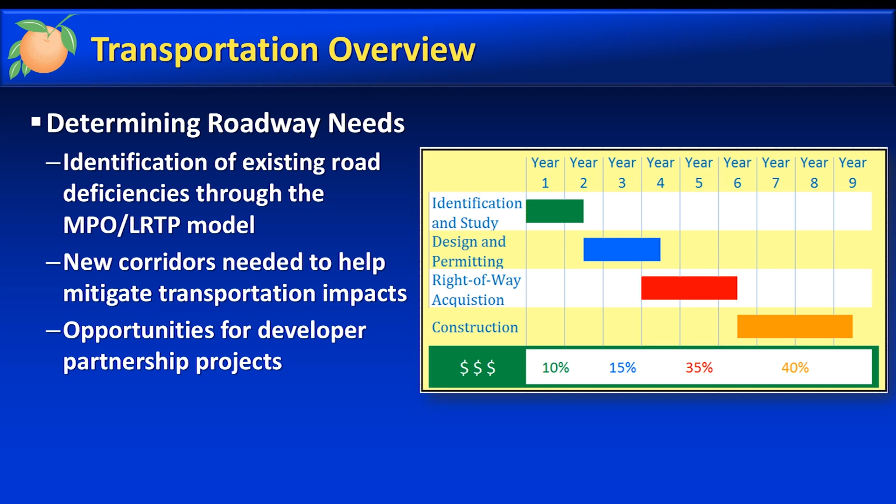Funding allocated to the Public Works Capital Improvement Program is dedicated to a variety of transportation improvements that are tailored to increase traveler safety, the reduction of travel time delays, and increased mode choice. The county's fiscal year runs from October 1st to September 30th each year, and the total funding for the current fiscal year, 2019-2020, is just over $121 million.

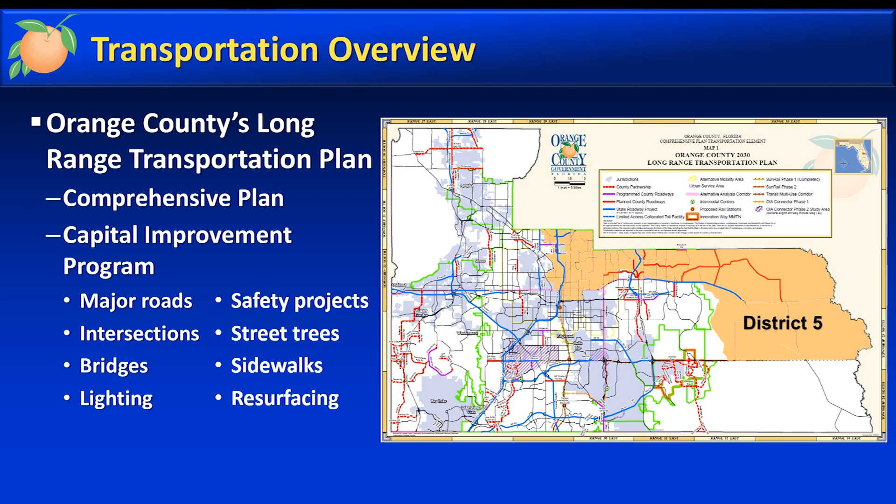Next, we will discuss the list of recently completed projects in Commission District 5.

The first project entails the UCF Area Pedestrian Safety Study. This 4.6-mile safety study was completed in late 2016. The intent of the study was to identify measures and physical improvements to specifically address pedestrian and bicycle safety. The project is currently in the design phase and should start construction next year.

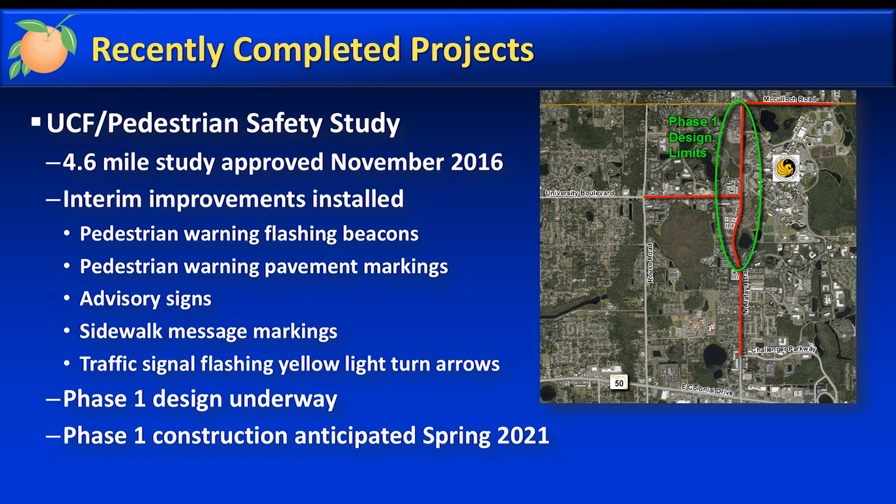Some of the improvements will entail the construction of a 10 to 12 foot wide sidewalk along the UCF campus, allowing for safer travel by both pedestrians and cyclists. The project will also include improvements at major signalized intersections, the addition of pedestrian scale lighting, signalized mid-block crossings on University Boulevard and Alafaya Trail, as well as pedestrian channelization to assist roadway crossings at appropriate locations. In the interim, the county has already installed pedestrian flashing beacons, pavement markings, advisory signage, along with other measures.

The other study recently completed is the UCF Research Parkway Study. This study was conducted at the request of the Central Florida Research Park to analyze and assess cut-through traffic, and the study was completed in May 2019.

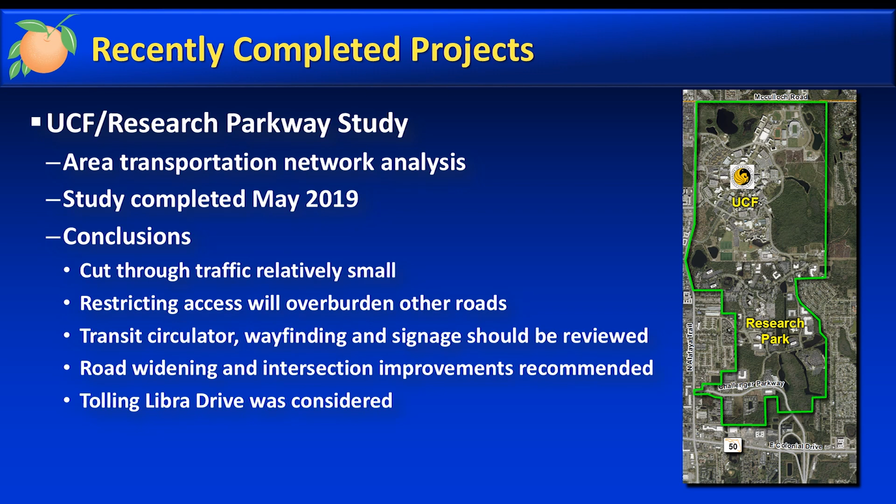The research park was concerned with the perceived number of cars cutting through the park to gain access to UCF and other areas. However, the study results showed that relatively few cars did in fact cut through, but nevertheless, a number of potential intersection improvements were identified that could alleviate some of the congestion in the park.

Next, we'll be moving on to projects underway. The projects currently underway include an area study, a safety project, and several roadway capacity projects.

The Northeast Orange County Area Transportation Study, or NEOCATS for short, is in the process of hiring a consultant team and will soon be fully underway. The NEOCATS project is currently going through our procurement process and should start this fall. The study is intended to assess current and future traffic conditions and needs in an area bounded by the Seminole County line on the north, north of State Road 50, east of Alafaya Trail, and west of Chuluota Road.

Once a contract is awarded by the county, we will seek input from the community to identify a range of appropriate improvements to address existing and long-term needs.

The next project is a roadway safety project on Fort Christmas Road. This safety project is currently in the construction phase and is approximately 20% complete. It is anticipated the project will be finished by October 2020.

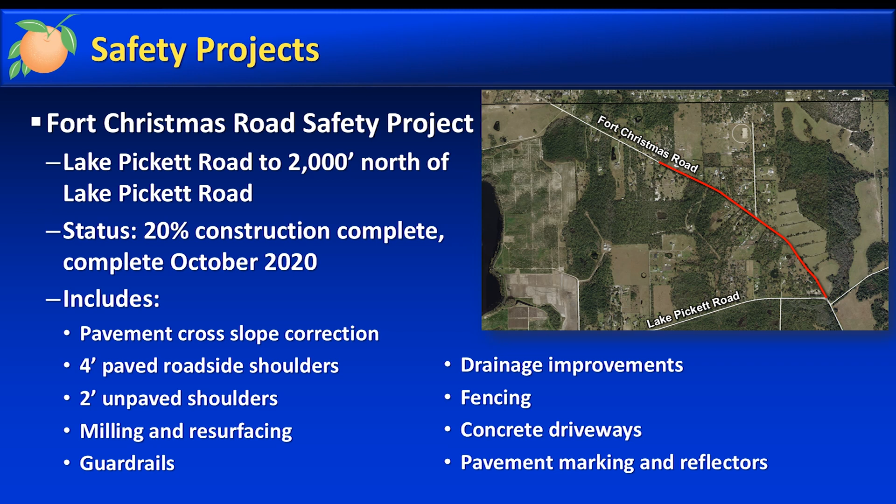Roadway capacity projects include brand new roads or the widening of existing roads. The first road capacity project is Richard Crotty Parkway.

This project begins at Semoran Boulevard and extends east to Goldenrod Road. This project is currently in the right-of-way phase. The study and design phases have previously been completed. The improvement is to construct a new 4-lane roadway intended to relieve traffic congestion on State Road 50 and University Boulevard.

In addition to the new 4 lanes, the project will also address stormwater needs and the provision of bike lanes and sidewalks on both sides of the road. Roadway lighting and landscaping will be included, as well as a portion of the Little Econ Greenway Trail. Construction is scheduled to commence in 2021.

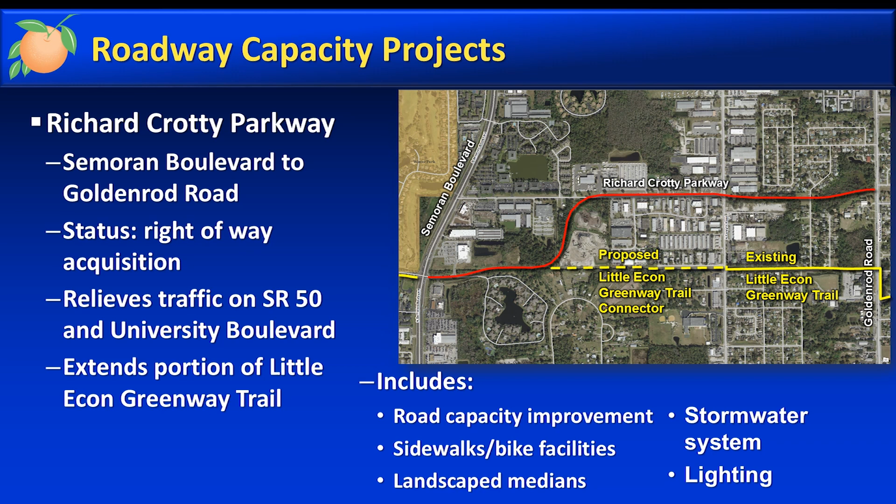The next project is Chuluota Road. The proposed Chuluota Road widening project extends from State Road 50 to Lake Pickett Road. As noted in the beginning of the presentation, this project will begin with a roadway conceptual analysis study, also known as a preliminary engineering study, to assess the elements associated with widening the road from 2 to 4 lanes.

This study will start in fiscal year 2021, and as with typical road widening projects, the installation of sidewalks, lighting, landscaping, and stormwater treatments will be evaluated, and the findings will be presented to the public and the Board of County Commissioners for approval. This project is fully funded through construction.

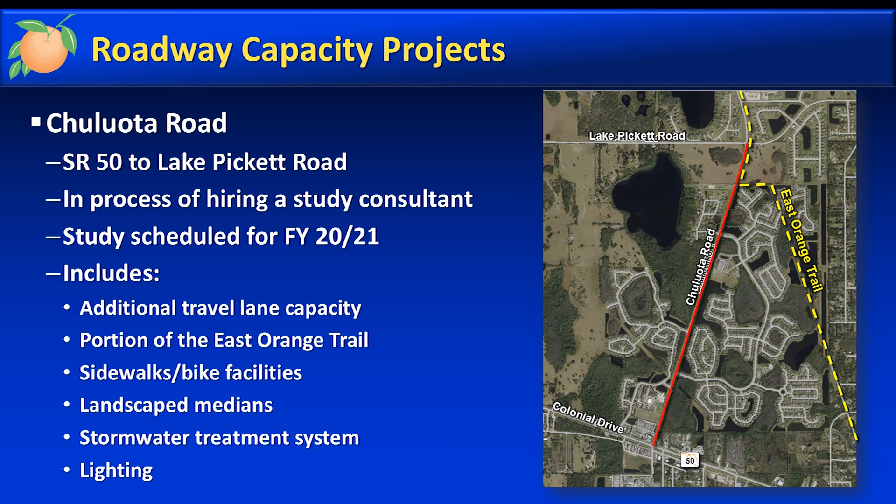Next is McCulloch Road. The McCulloch Road RCA study also entails the widening of the existing 2-lane road to a 4-lane divided roadway from North Orion Boulevard to North Tanner Road.

In addition to the typical elements associated with road widening, this project will also address and identify wildlife crossings along the corridor. The study is scheduled to start later this year.

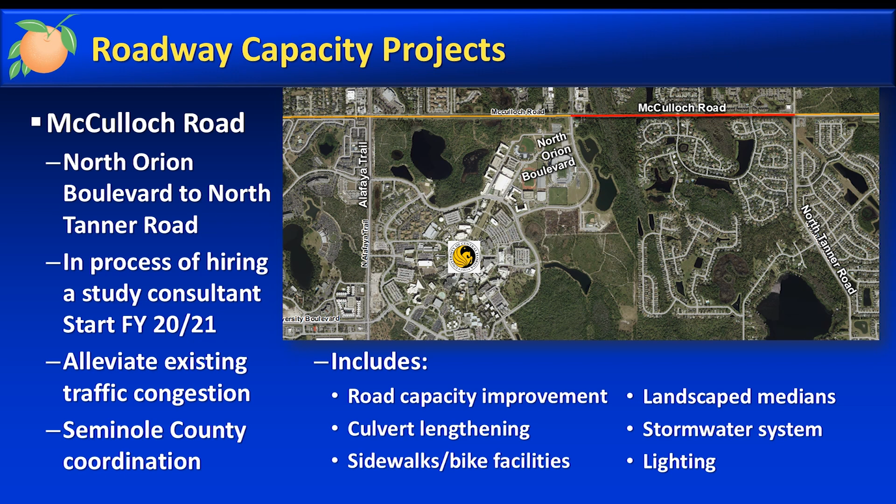And finally, we will discuss the future projects. The next few slides will show a planned safety project, intersection studies, and roadway capacity projects to begin in the future.

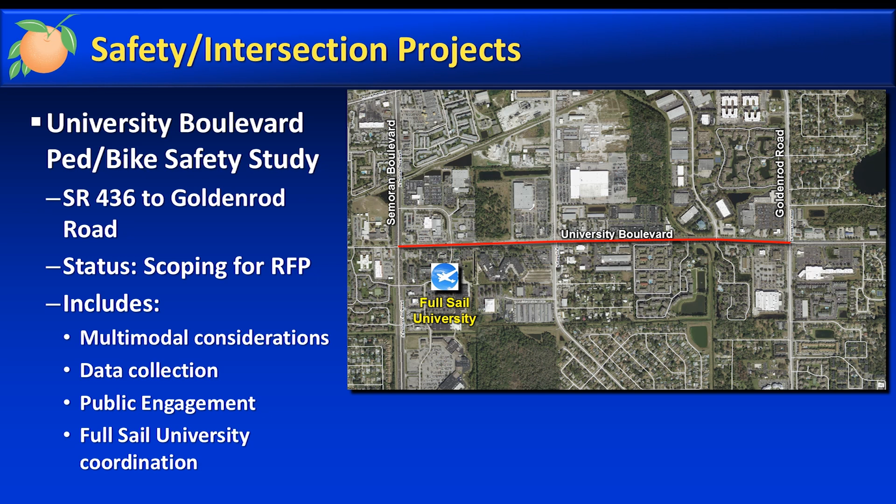There are 6 intersection projects that will be evaluated for safety and operational improvements. Each of the following projects will begin with an evaluation of safety and operational needs, followed by design, right-of-way acquisition if needed, and construction when funding is available.

The intersection located at Lake Pickett Road and Colonial Drive will be coordinated with the Florida Department of Transportation based on the recently completed 6-lane widening of Colonial Drive. The intersection at Lake Pickett Road and Percival Road will be analyzed to address the potential of constructing a new traffic signal as well as adding turn lanes.

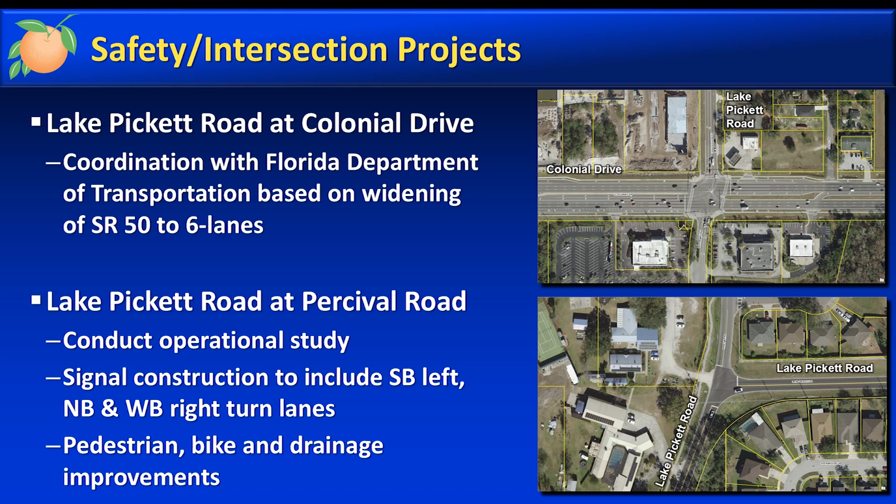The next project entails the intersection at Lake Pickett Road and North Tanner Road. Again, the intent of the project is to conduct an operational study to eventually construct a new traffic signal and appropriate turning lanes. The intersection of McCulloch Road and North Tanner Road will be addressed as part of the McCulloch Road RCA widening study discussed earlier.

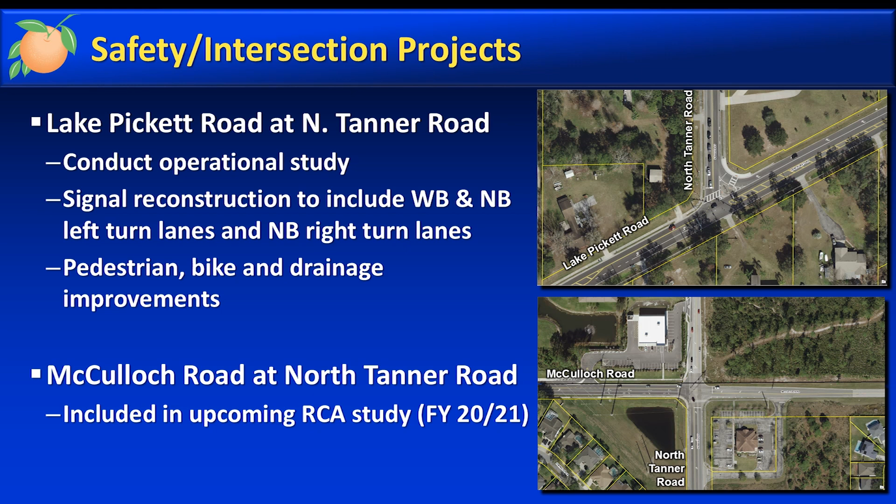The last 2 intersections we will discuss are the County Road 13 and Colonial Drive intersection and the Suntree Boulevard and University Boulevard intersection. The County Road 13 intersection will also be coordinated with the Florida Department of Transportation for the Colonial Drive widening project scheduled to start in 2023. The Suntree intersection traffic signal retiming improvements have already been installed. The county will continue to monitor the intersection to ensure that it is functioning properly.

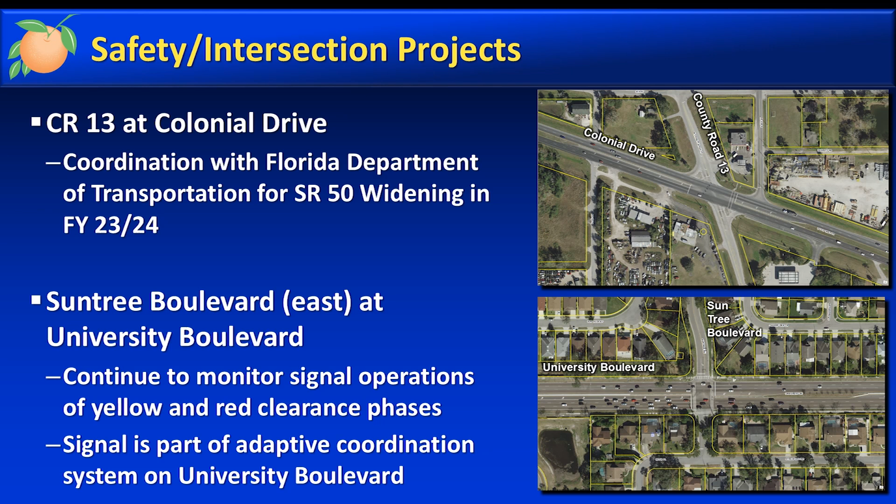The following roadway capacity projects are listed on Orange County's Long-Range Transportation Plan and are anticipated to need improvements sometime in the future. The first project is Richard Crotty Parkway. As you may recall, Richard Crotty Parkway from Cimarron Boulevard to Goldenrod Road is currently in the right-of-way acquisition phase. This segment of Richard Crotty Parkway further extends the roadway from Goldenrod Road to Dean Road. Design for the project is complete. However, funding for future phases is yet to be established.

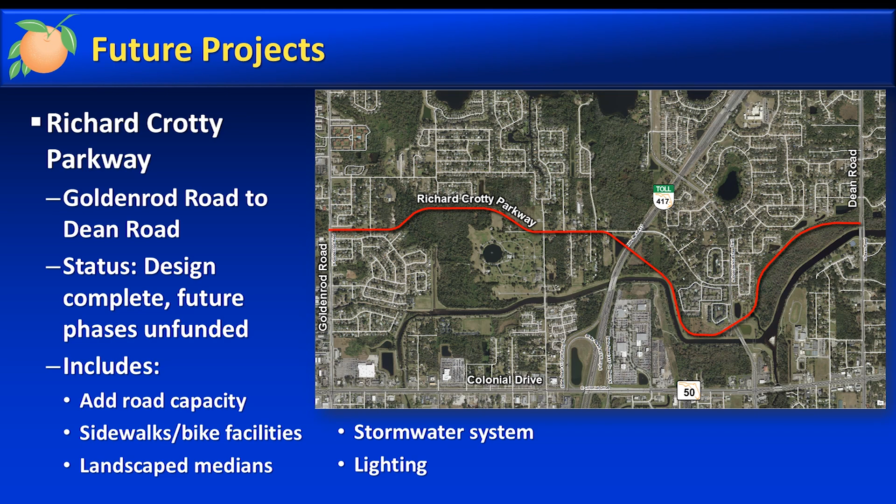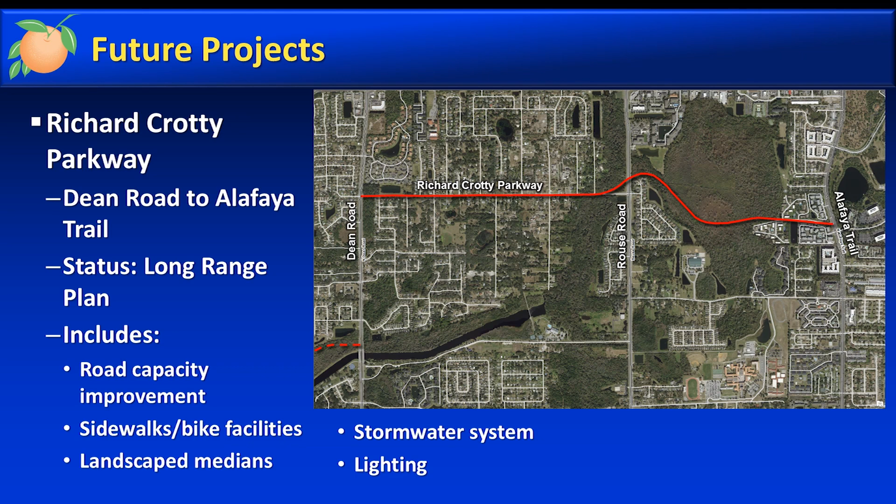Richard Crotty Parkway from Dean Road to Alafaya Trail has also been identified as a future extension of the roadway. This segment of Richard Crotty Parkway is unfunded and a preliminary schedule is yet to be identified. Richard Crotty Parkway, extending from Alafaya Trail to North Tanner Road, is the final section of this planned roadway. No schedule has been established to commence the study or other production phases.

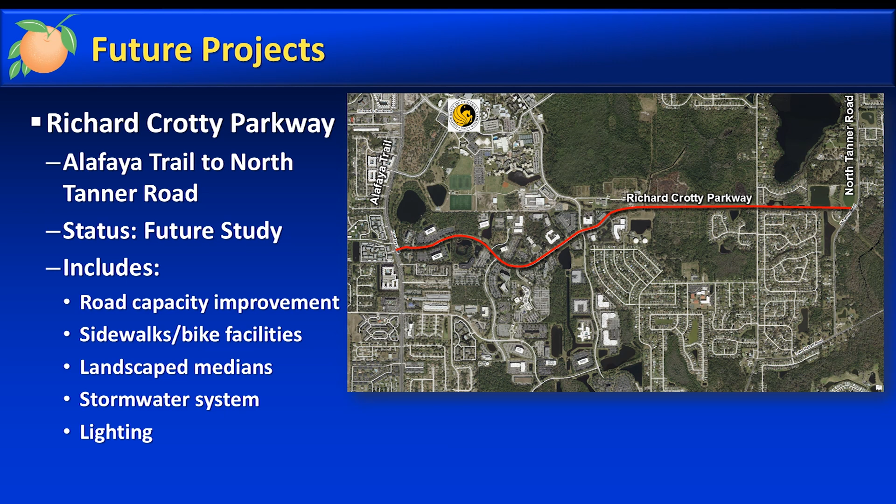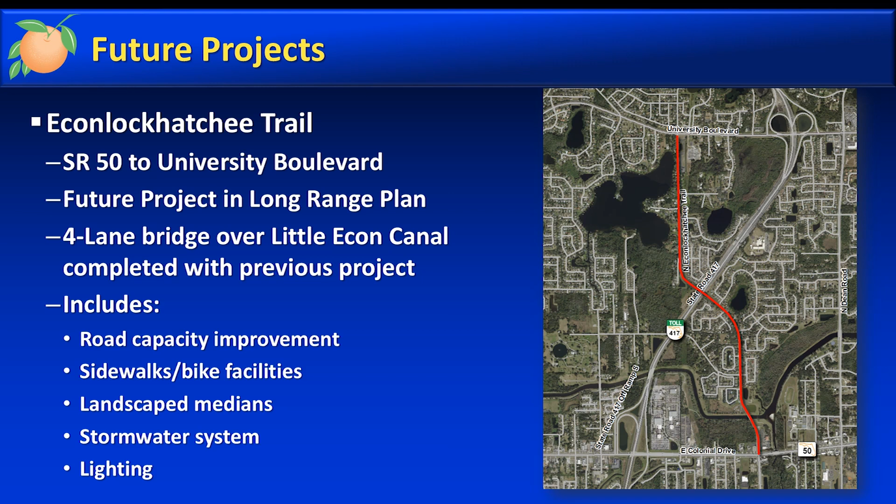I will provide a brief overview of the county's Trails Master Plan and discuss the East Orange Trail corridor. In 2012, Orange County developed a county-wide Trails Master Plan. The process included reviewing existing and future off-road multi-use pedestrian trails. 12 corridors were identified. These corridors were ranked and prioritized based off connectivity to existing trails in Orange County and adjacent counties, schools, and parks. The county is currently in the process of updating the Trails Master Plan and will have it finalized by next summer.

The East Orange Trail was one of the trail segments in the master plan. The trail is 21.5 miles long. It begins at Alafaya Trail and the University of Central Florida and traverses east along McCullough Road, south on Chuluota Road to Highway 50, connecting to Bithlo Park, and eventually to Fort Christmas Park and the Orlando Wetlands Park.